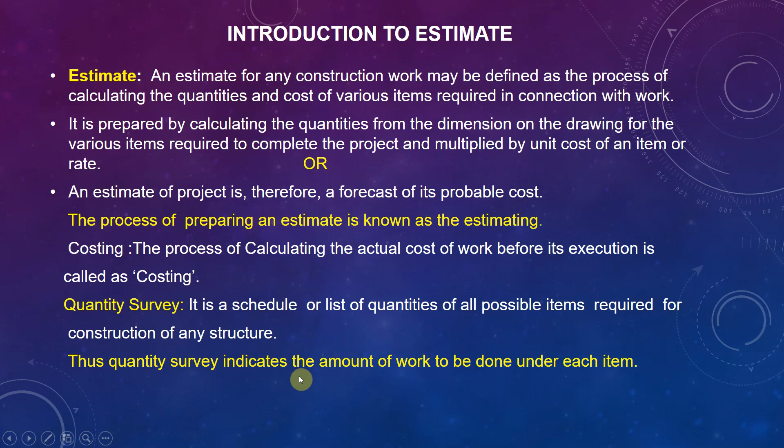Now let us look at what is meant by quantity survey. It is a schedule or list of quantities of all possible items required for construction of any structure. Thus, the quantity survey indicates the amount of work to be done under each item.

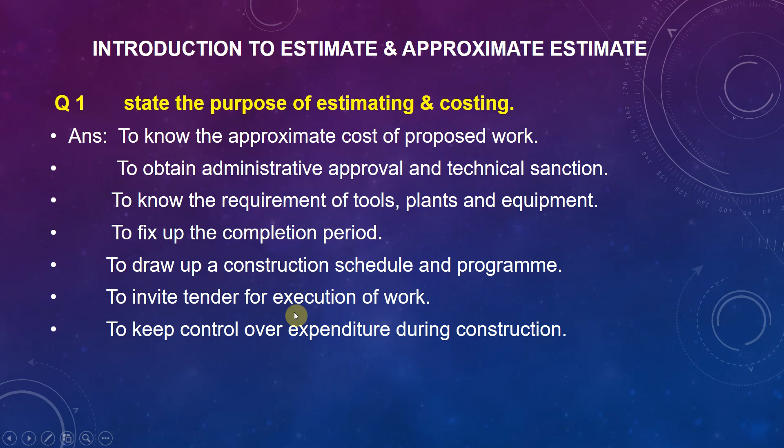Now, let us learn what are the purposes of estimating and costing. There are many purposes of estimating and costing: to know the approximate cost of a proposed work, to obtain administrative approval and technical sanction, to know the requirement of tools, plants and equipment, to fix up the completion period, to draw up a construction schedule and program, to invite tenders for execution of work, and to keep control over expenditure during construction.

Now let us learn what are the different types of estimates. There are basically approximate estimate, detailed estimate, revised estimate, supplementary estimate, and repair and maintenance estimate.

Now let us learn about the situations when the supplementary estimate is prepared. It is a detailed estimate for additional work and is prepared when additional works or changes are required to supplement the original works during the execution of work. The fresh detailed estimate of additional work is prepared in addition to the original estimate. The abstract should show the amount of the original estimate and the total amount including the supplementary amount for which sanction is required.

Now let us differentiate between the revised estimate and supplementary estimate. We must know the basic difference between these two types of estimate. Revised estimates are prepared when there is a change of rate or quantity of material, or major additions or alterations are introduced in the original work. Whereas supplementary estimates are prepared when additional work is required to supplement the original work during the progress of work.

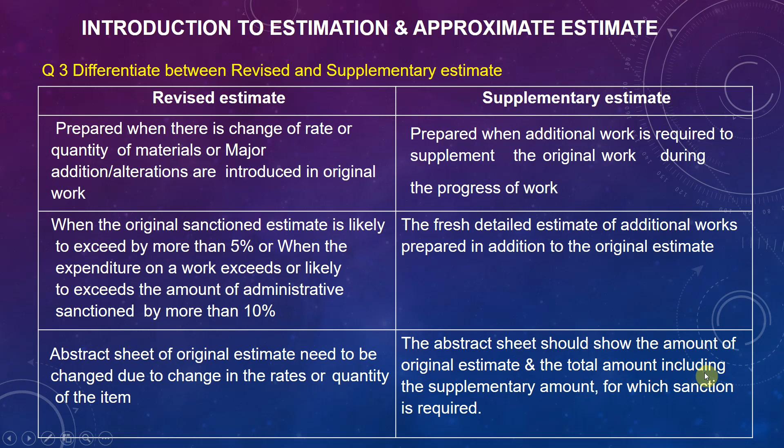Third point of differentiation: in a revised estimate, the abstract sheet of the original estimate needs to be changed due to the change in rates or quantity of an item. In a supplementary estimate, the abstract sheet should show the amount of the original estimate and the total amount including the supplementary amount for which sanction is required.

Now let us learn in detail what is meant by approximate estimate, also called a preliminary estimate. This estimate is required for preliminary studies of various aspects of a work or project to decide the financial position and policy for administrative sanction by the competent authority. In case of commercial projects, such as irrigation projects, residential building projects and similar projects which earn revenue, the probable income may be worked out. To prepare the approximate estimate, less skill and time is required.

Now, let us study what are the situations under which the approximate estimates are prepared. Approximate estimates are prepared for different requirements or situations. Number one, to give the client a rough idea of probable expenditure in short time without calculating the actual quantities, from cost of similar structure having similar specification, construction and locality.

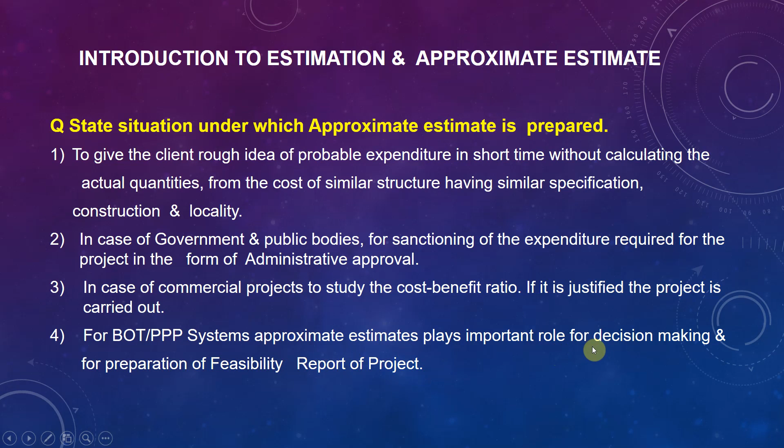Second one, in case of government and public bodies, for sanctioning of the expenditure required for project in the form of administrative approval. In case of commercial projects, to study the cost benefit ratio. And if this cost benefit ratio is justified, then the project is carried out. In case of BOT or PPP, that is build, operate and transfer projects or public private partnership projects, the approximate estimates play important role for decision making and for preparation of feasibility report of project.

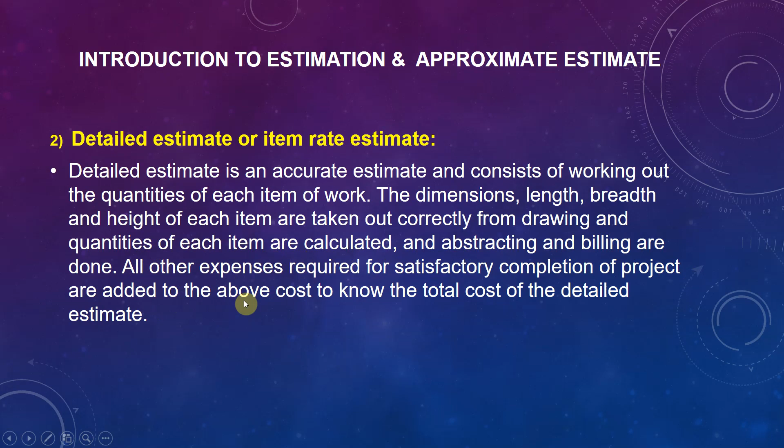Now let us learn about detailed estimate or item rate estimate. Detailed estimate is an accurate estimate and consists of working out the quantities of each item of work. The dimensions like length, breadth and height of each item are taken out correctly from drawing and they are entered in the measurement sheets for calculation of the quantities. Therefore, these quantities of each item are calculated and then abstracting and billing are done. All other expenses required for satisfactory completion of project are added to the above cost to know the total cost of the detailed estimate.

So the next part is what is DSR, what is SSR, also called as schedule of rates. DSR is district schedule rates. SSR is state schedule rates. So first, what is meant by the schedule of rates? Schedule of rates are the rates of different items of works generally executed by the PWD department in different construction or maintenance works. The rates are analyzed adopting prevailing market rates of labor and material at the time of preparation of schedule of rates. Schedule of rates are guiding factors for preparing estimates of works to be taken up for execution and for justification of rates quoted by the tenderers for award and execution of works.

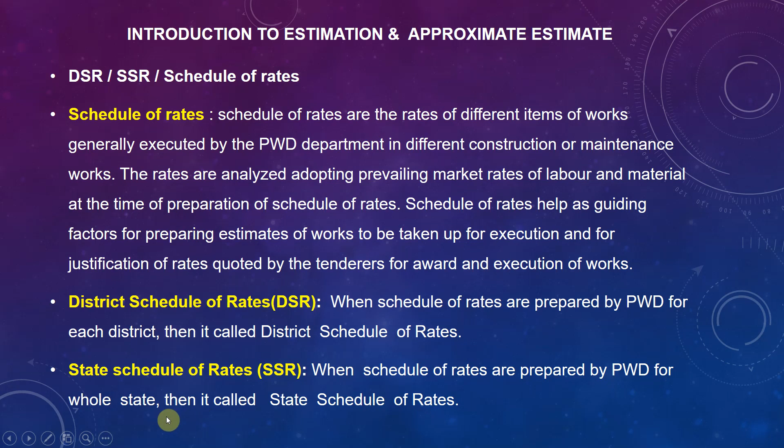District schedule rates: when schedule of rates are prepared by PWD for individual districts separately, then they are called the district schedule rates for that particular district. Nowadays, the PWD prepares not the district schedule rates, but the state schedule of rates. When schedule of rates are prepared by PWD for the whole state, then they are called state schedule of rates.

Now, while executing any construction work, maybe a building or roads or any other structure, we have to carry the materials from one place to another place. Similarly, we have to work below the ground level or above the ground level. So in order to account for the vertical distance traveled by the materials, equipment and tools, as well as the horizontal distance traveled by materials, we have to learn different concepts. The first concept is lead. It is the horizontal distance between the trench pit and the place where excavated earth is deposited, or simply the horizontal distance to be covered whenever material is transferred from one place to another. Normally lead is taken as 30 meter. Separate measurements are taken for every 30 meter lead.

Lift. The depth of excavation or the vertical movement of material is called a lift. Normally lift is taken as 1.5 meter. Separate measurements are taken for every additional 1.5 meter lift.

Now let us learn about rate analysis. Rate analysis is the process of determining the rate per unit of a particular item of work from the quantities and costs of materials, labor, tools and plants, etc.

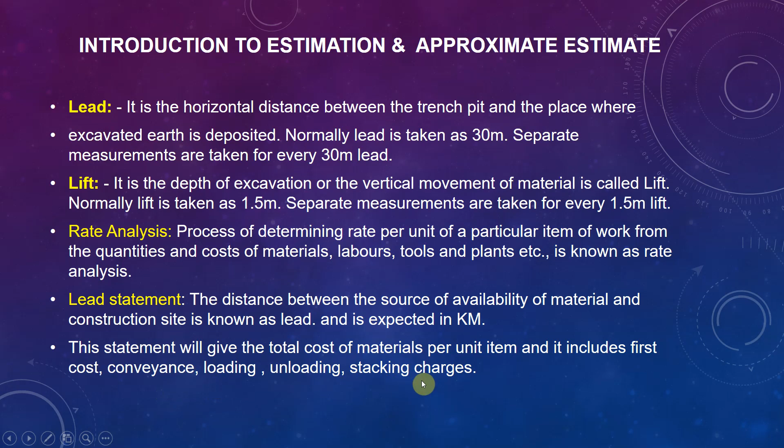Now let us learn about the different concepts which are very important for the detailed estimate of any construction activity. So in this part we are going to study what is meant by contingencies, work charged establishment, percentage charges, provisional sum, prime cost, and day work. So first let us study contingencies.

It is the incidental expense of a miscellaneous character which cannot be reasonably predicted during preparation of the estimate, and to meet such unforeseen expenses an additional amount of 3% to 5% of the estimated cost of the work is provided in the total estimate. Now the next one is work charged establishment.

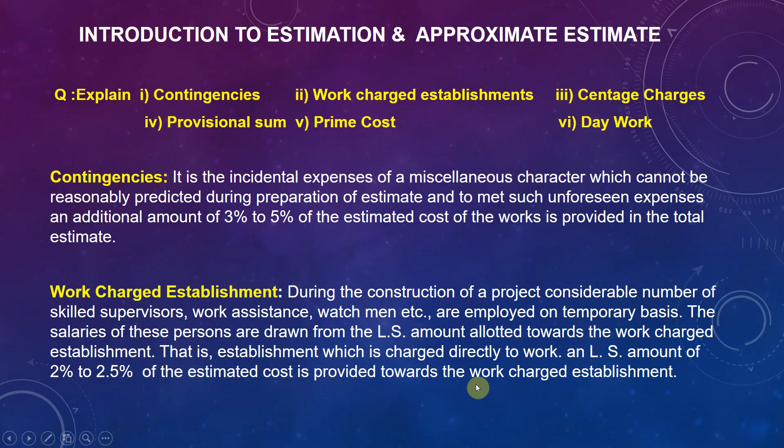So what do you mean by work charged establishment? During the construction of a project, a considerable number of skilled supervisors, work assistants, watchmen, etc. are employed on a temporary basis. The salaries of these persons are drawn from the lump sum amount allotted towards the work charged establishment, that is, establishment which is charged directly to the work, and a lump sum amount of 2% to 2.5% of the estimated cost is provided towards the work charged establishment.

Now let us learn about centage charges. When an engineering department executes the work of another department of government or local bodies, a percentage amount of 10% to 15% of the estimated cost is charged for the recovery of the cost of establishment, planning, designing, supervision or execution of work, and is called centage charges.

Now let us study what is meant by a provisional sum. A certain amount provided by an experienced estimator in the estimated cost of the project for some special type of work whose details are not known at the time of preparing the estimate is called a provisional sum. Some special works are as follows. In case of shifting of water lines, installation of air conditioners and fitting of different equipment, these costs are not known while preparing the detailed estimate. Therefore, some amount is considered as a provisional sum for these unforeseen items during preparation of the estimate.

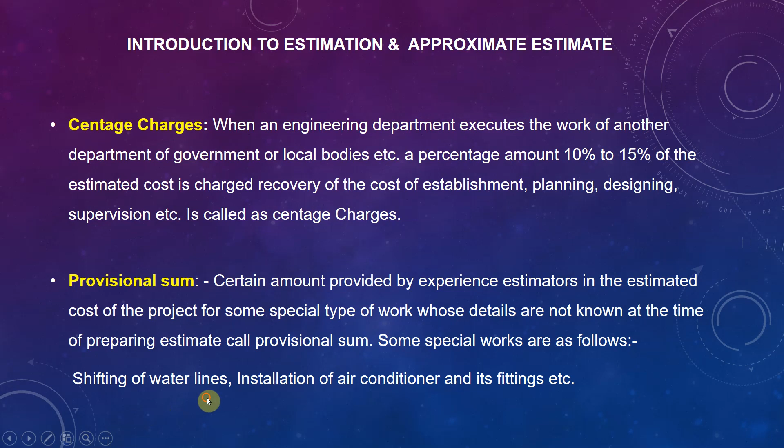Next one is prime cost. Prime cost is the actual cost of an article at the shop and refers to supply of articles only and not to carrying out the work. During preparation of an estimate, it is not always possible to specify the exact types of articles required. For example, water supply fittings, sanitary fittings, door and window fittings, etc. are to be decided during the time of actual fitting according to the choice of the owner or engineer in charge. For the execution of such items, a reasonable amount is kept in the estimate as a prime cost.

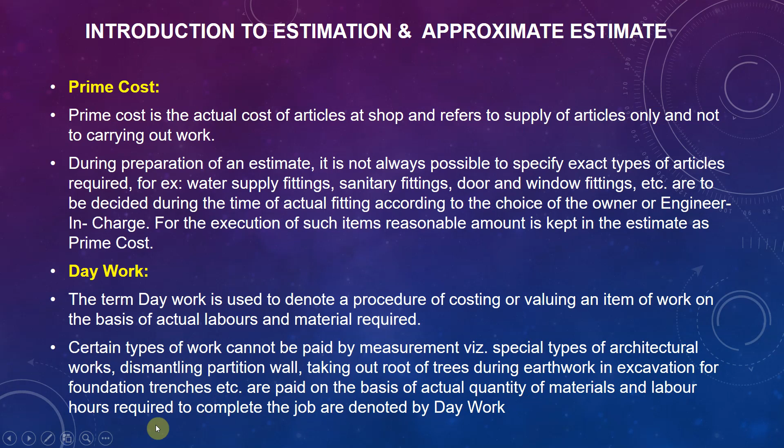Now let us learn what is meant by day work. The term day work is used to denote a procedure of costing or valuing an item of work on the basis of actual labor and material required. Certain types of works cannot be paid by measurement, such as special types of architectural works, dismantling partition walls, taking out roots of trees, doing earthwork in excavation for foundation trenches, etc. These are paid on the basis of the actual quantity of materials and labor hours required to complete the job and are denoted by day work.